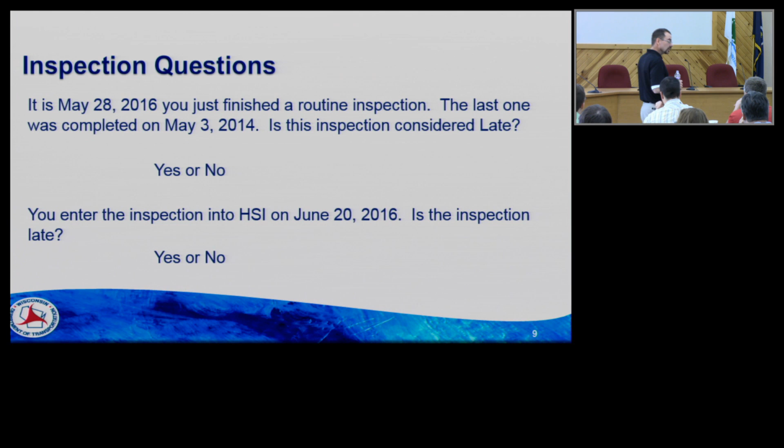All right? Now, you don't get around to entering that inspection until June 20th. Now is that inspection late? Yes or no? Anybody say yes? We got a yes. Anybody else want to agree with Mark? Okay. We got a couple. 3, 4. The rest of you say no? Okay, let's talk about this. The answer is no. It is not late.

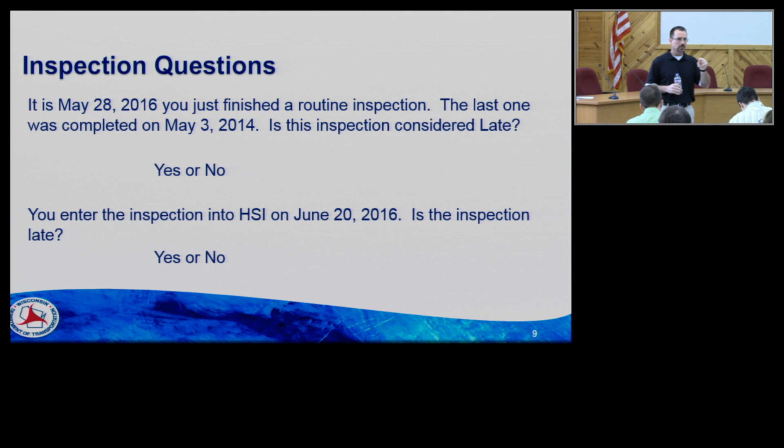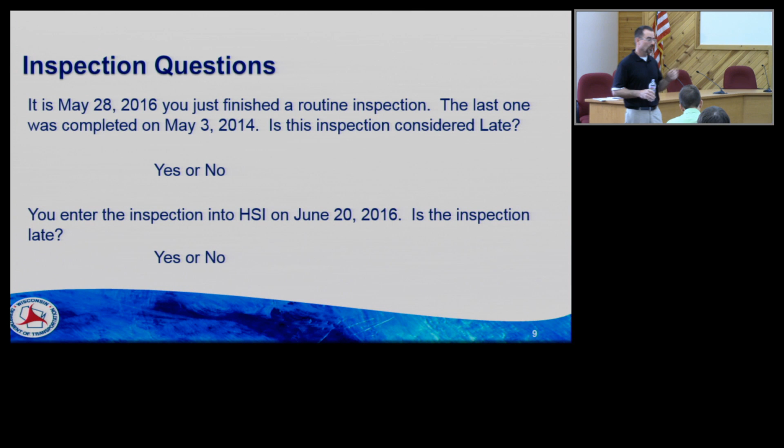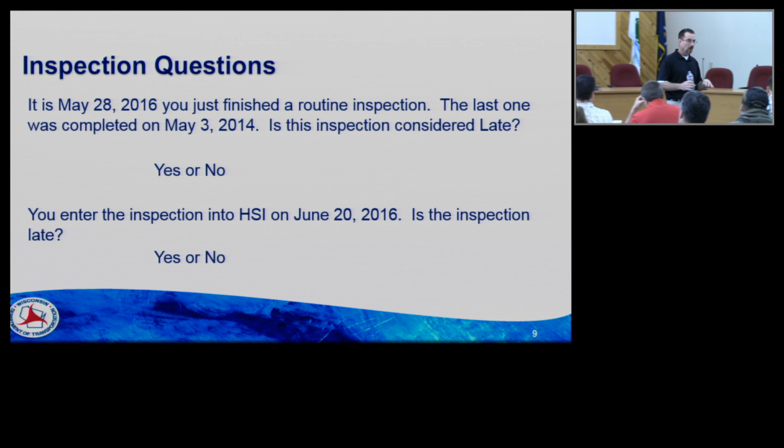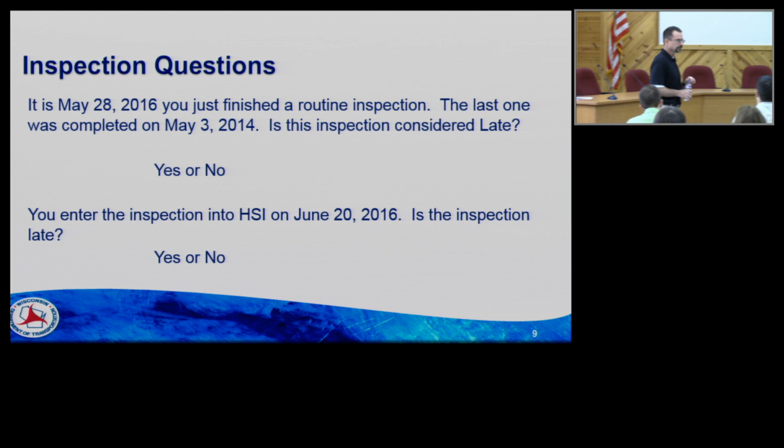All right? Because when you enter that inspection, and we're going to be talking a little bit about that during quality control, we are allowing you basically the next month to get it entered. Because we can track when it's entered. When you enter it, you're still going to put May 28th, right, as your inspection date. You should be, right? But HSI is smart enough to know you're entering it on June 20th. Okay? It is not late, even in June when you're entering it. Okay, did I just confuse everybody here? Okay.

And the reason I did that question is I want us to turn in our manuals to the last divider. Okay? So, we're going to talk a little bit about performance measures. I mentioned it in my introduction. We get measured on, because the federal highways, as they call them, metrics, everybody hear that term? They have 23 metrics just pertaining to bridge stuff that they measure each state. Okay? And one of the metrics is late inspection.

All right? And what we do as a state, because the state includes all the local bridges, remember the partnership I talked about in the beginning? You guys, doing your inspections, 2/3 of it go into the reporting of the performance measures because about 2/3 of the bridges in the state are local bridges. So what you guys do on the local side feeds into the performance measures for the entire state. Okay? And one of the things we do as a DOT is we monitor these metrics or performance measures, and then of course we report them out.

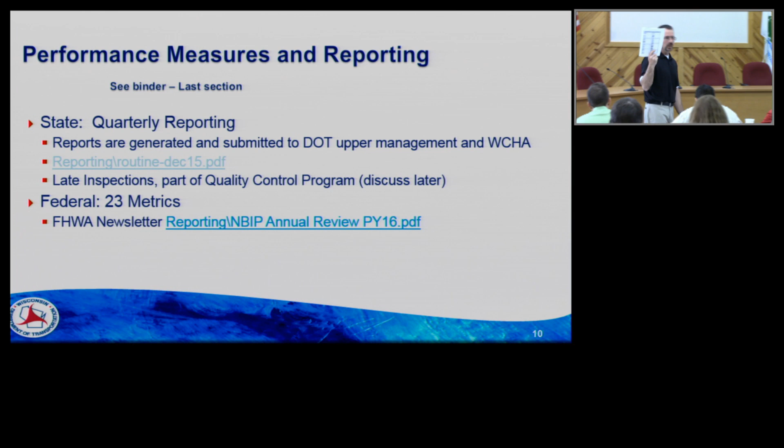And the quality control plan, which we're going to be talking about a little bit later this afternoon, a lot of it is geared, and that's only one of the 23 metrics in late inspections. So we're monitoring 22 other things. That's just the way it is. Willie? Most of these are probably load posted bridges. How many of these are attributed to HSI not knowing? Well, yeah, then you got to get into the details.

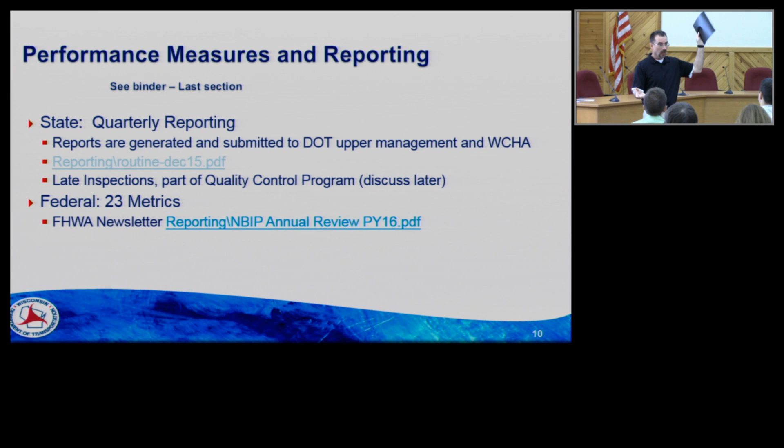Okay? I know for a fact what happened, especially out of the Wisconsin Rapids office, was we kind of got balled up switching from interim inspections on the 12 months to routine. Okay? We had interim inspections entered, but we were looking for the routine. It didn't see the routine, so it got flagged. That's our one on Chris's line that we missed. Yeah.

So we're constantly improving. That's one of the other reasons why I host this, to get this stuff so everybody understands. Last year, some stuff came out mid-year. We get emails, and if your emails are like mine, I fly through them because I get 40 a day, and it's like, okay, what's this, oh, here's another report, I'll look at it later. Well, pretty soon it's down below the screen, and I'm on to the next shiny object.

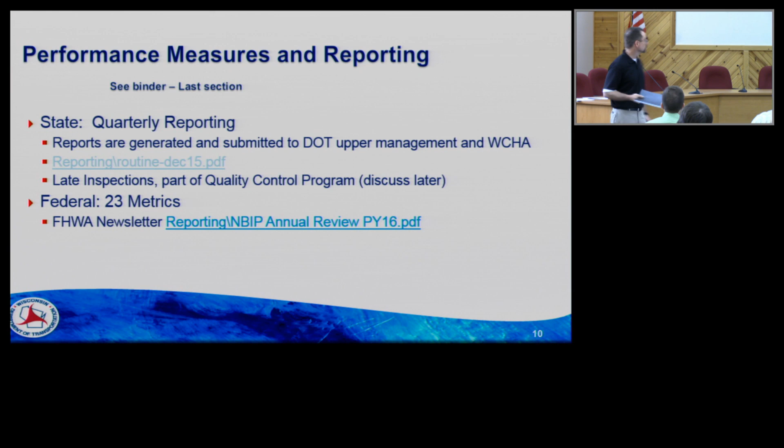Right. I think you just want to mention too that we don't allow interim inspections anymore, like for 12 months. In the past we have, but now they at least have to be a routine inspection, otherwise they get flagged. Yep, and we're going to be covering that real shortly with the load posted policies, but I'll just reinforce. In the past, we did a lot of interim inspections, load posted. Those are official routine inspections now, all right? All right. Tom, is it worth mentioning why we're doing that? Why they're now routines and not interims? A little history, a little background.

And I'm not going to steal the show, but we're not just doing these things because we decided that it was time for a change. FHWA pointed out that the National Bridge Inspection Standards for the different types of inspections, routine, fracture critical, and underwater dive, any of those special ones, gives us a maximum frequency. So for routines, it tells us that we have to inspect all bridges within 24 months.

It also requires that the state have a policy and procedure in place for a subset of bridges that will require an inspection frequency that is more frequent than the 24 months. We had that. They were the load posted bridges, the bridges that were in poor condition. We had called them interim or load posted inspections, which really don't fit what the NBIS is telling us. So the feds pointed out that we needed to change those and call those a full routine and treat them as a full routine in order to be in compliance with those National Bridge Inspection Standards.

So that is the big driving force of why you saw that change from the interims or the load posted inspections, whatever we want to call them, to a full routine inspection, because that is what we needed to do in order to meet the letter of the National Bridge Inspection Standards. That applies also to the underwater dive inspections. There, we have to do those within 60 months, but we also have to have a subset defined, which we have in the policy, of ones that need it more frequently.

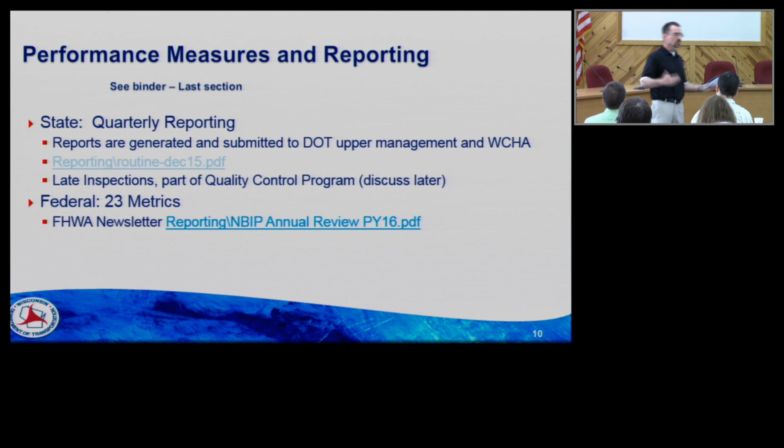So bottom line, we just don't do things to do things. We always have a reason. Generally speaking, 9 times out of 10, we're being told to do it from a federal standpoint for whatever reason, because they're looking at it from a national level. They're trying to improve stuff nationally. And it's like, you know, government, you got to fit everything into a box.

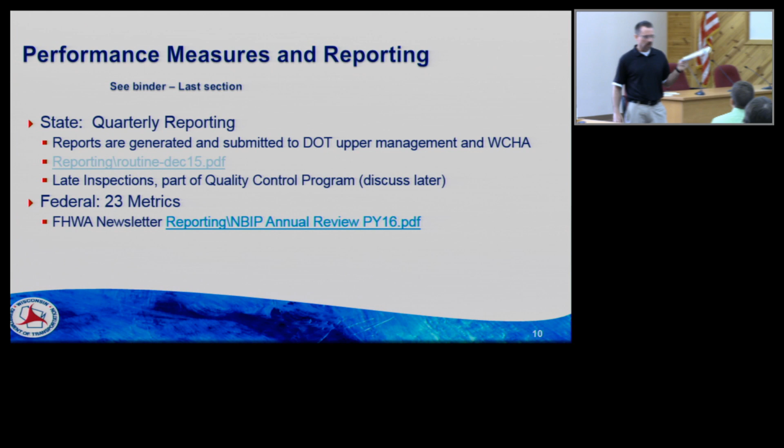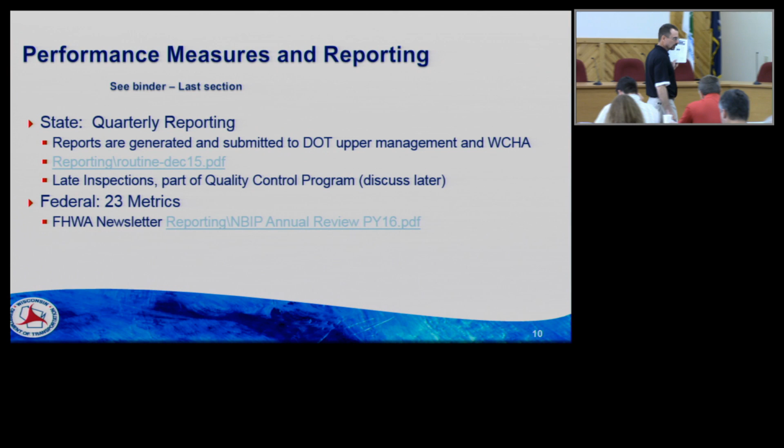Anyway, the other one, I'm not going to have you call it up. In that same section behind the pie chart performance measure, I provided, this is our federal bridge engineer for Wisconsin, Joe Bellucci. He put together this, you can't call it a newsletter for some reason, but it's kind of a summary of Wisconsin that he's issued, and he shares this with all his other bridge engineers across the country. You know, 23 metric performance. He tells us how we're doing. We're going to refer back to this a little bit later. Inspection frequencies, team leader qualifications.

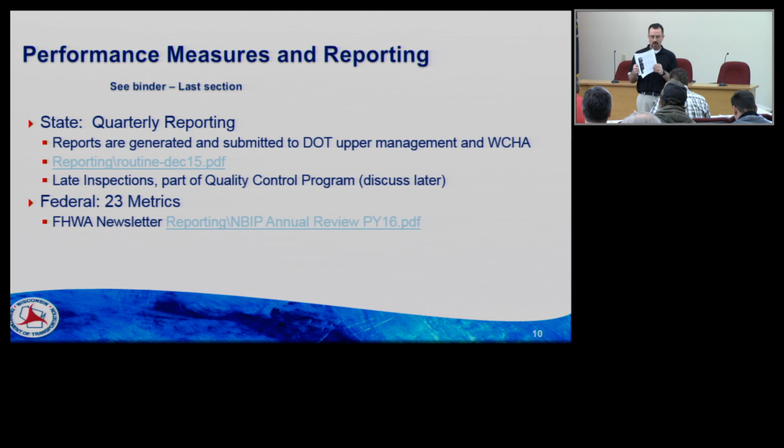If you get a chance, read through it. I didn't realize he even did this. I just got it about a month ago. I'm going to share it because we hear about these federal metrics a lot. And we do at the regional level, but we really don't see the outcome much. You'll see like this performance report, but like I said, there's 22 or 23 other ones. Maybe I'm missing it somewhere, but I don't see like a report card, unfortunately.

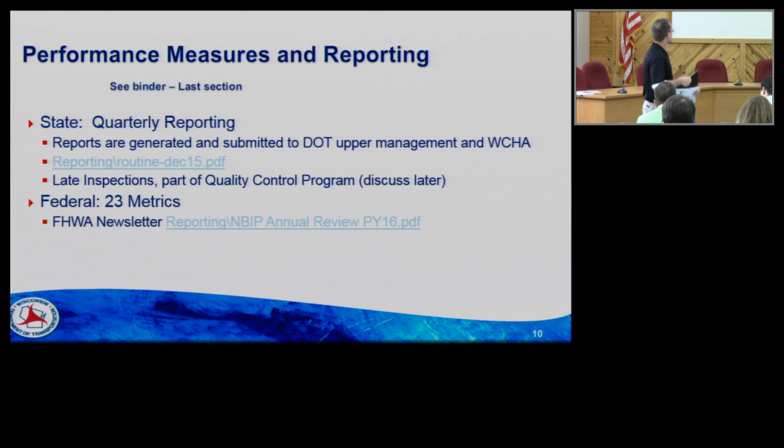Anyway. Next slide. And now what we're going to do, I got a series of about 3 more questions to get you guys going here this morning. That's going to lead us right into our current policies. So, all right, question number 2 for the morning. We're doing pretty good. I was gonna have a session called Stump the Instructor, but then I changed it, and I'm gonna try to stump the students.

You arrive at your bridge, you do just a normal routine inspection. The ADT listed on the form is dated in 1997 with a count of 150. Does that seem familiar? Local road, 150, 20, I don't know. What should you do? Nothing. You have no idea what the ADT is, right? Stay at the bridge for 8 hours, count the vehicles, and multiply by 3.

Order the municipality to perform a traffic count, or D, use engineering judgment and update the ADT year and the count. All right. Who says A? Nobody? Oh, we got one. This one? No one? Two. They're both commissioners. All right.

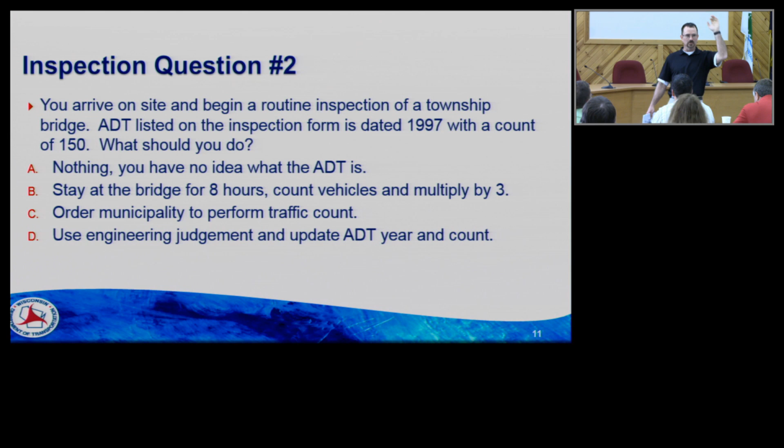Stay at the bridge for 8 hours, count the vehicles, multiply by 3. All the consultants are with this. Oh, no. Anybody say that one? Okay. C, tell the township to do a traffic count. Anybody say that? Or use some judgment, update the ADT and the count. Two people? What about the rest of you?

D? Okay. It's tough to do on the local system to get a traffic count. What's our requirement for ADT? Anybody? We want it current, within 5-7 years, preferably. Okay? You're on a town road, you're out there for an hour, 2 cars go by. Do you have 1,000 ADT on that road? No. Okay? If it's 150 or 200, the ADT really doesn't matter. ADT does go in the sufficiency number, but when you're on that low end, it doesn't count for nothing.

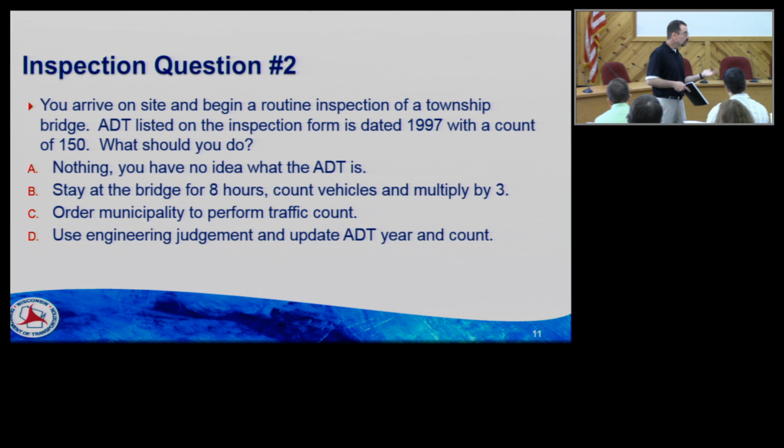So, my recommendation is get the year current, use some judgment. If you're out there and you're getting run over inspecting the bridge, you got a fairly high ADT. You might want to talk to the township. I know a few townships that have counters. Tell them to put the counter out. The counties, they do counting for their paving operations. See what you guys have, okay?

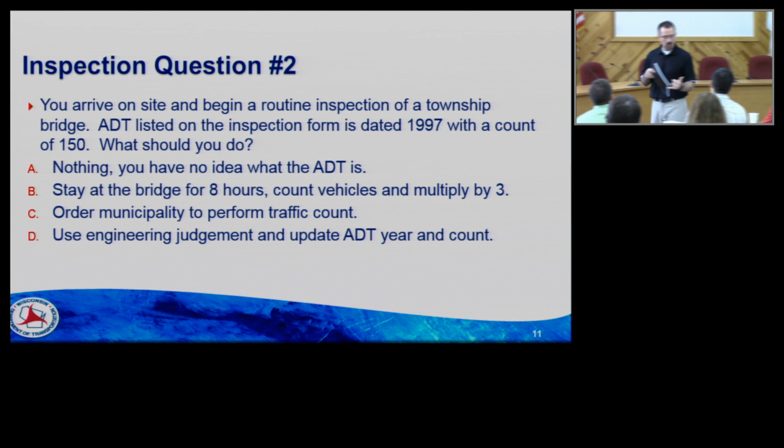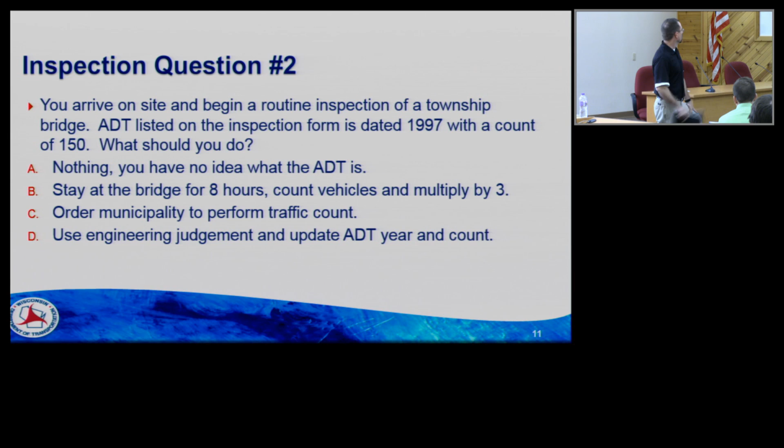All the townships and the counties have to run, what's the local, the PASER? Not PASER. Is that what it is? And part of PASER is ADT. I don't know where they get their numbers, but I know some townships, they do some hose counts to update their roads. So, D is the final answer. You can always call a friend here if you want to use that option. All right?

Next question is, all right, we just got 3 inches of rain, and most creeks and streams are overflowing their banks. Another inch of rain is forecasted overnight tonight. You got 2 scour critical bridges in your county. You're the bridge inspector. What are you going to be doing? This is fairly similar to what happened about a month ago around here. As bridge inspectors, what did you do? Did you find the POAs for the scour critical bridges and begin flood monitoring, as outlined in the POA, plan of action?

You start monitoring all the bridge crossings in the county. You notify your program manager, PM, of the conditions and order new profiles for all the bridges because of the significant flood event, or D, all of the above. All right? Anybody for A? Couple? B? C? E, phone a friend? Okay, you should be doing all of it. You gotta recognize you have a flood event.

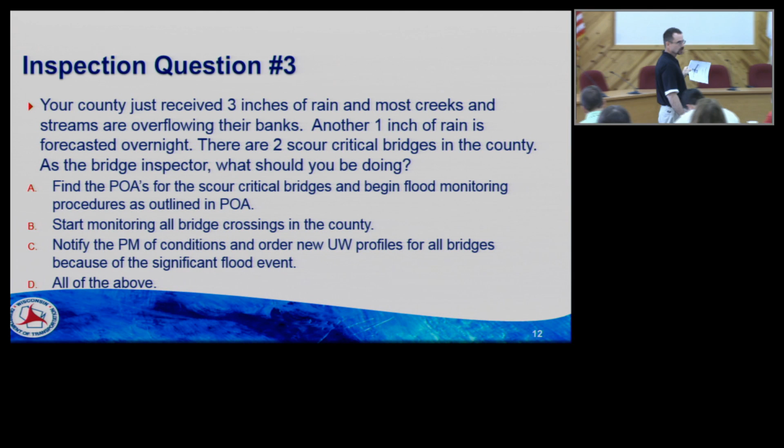And what's the controlling limit to order a new profile? A significant flood event, which is defined by a creek or stream overflowing their bank. So in this case, countywide, you should be doing all brand new profiles with this round of inspections. Okay?

Questions? Chuck? As far as monitoring the stream with the plan of action, that responsibility comes to the owner of the bridge, correct? That comes to the responsibility outlined in the POA. Okay. And however the POAs are written, a lot of it falls back to the county highway department, or possibly the town or the town person.

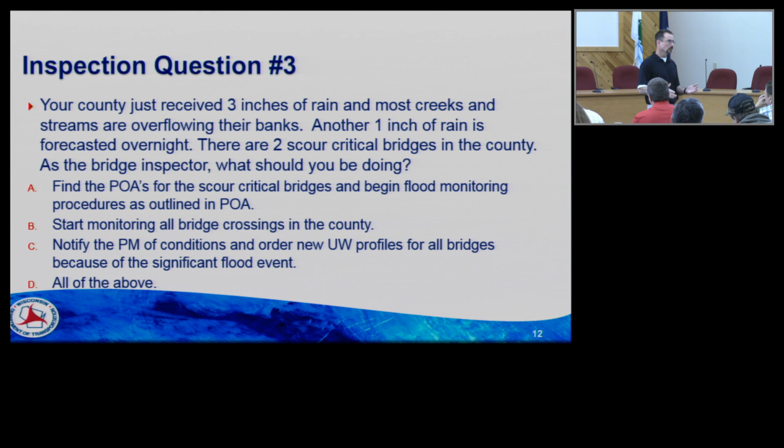But some of these POAs, and that's why the POAs all have to be updated, were drafted in 2010. People are gone that are listed. All right? So that's one of the reasons why we're updating the POAs. All right, any other questions with this one?

All right, next question. You just finished a 24-month routine inspection of a bridge with a 30-ton load posting. Okay? I know, don't say anything. You downgraded the NBI super from a 5 to a 4 based on conditions. What's going to happen?

A, a new load rating is required. B, you need to perform an interim inspection every 12 months. C, the bridge will automatically be placed on a 12-month inspection frequency. D, you should fill out a new load posting verification form, DT 2122, or nothing. Just enter the inspection and be done.

All right? A, B, no B, C, a few, D, is there a couple, or E? Where's the most of you? Yeah, I saw about 15 hands go up. Okay. Answer is C.

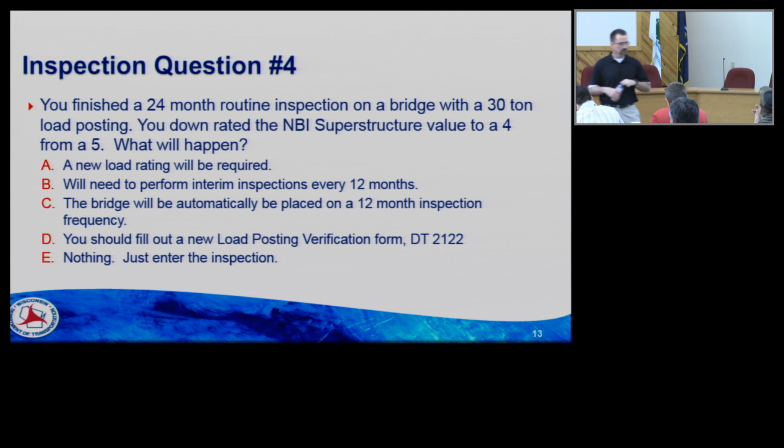Now, I did see a couple in HSI, like on our bridges, I got 2 of them that were load posted and the NBI form, it's still listed as a 24 month. Load posted. One is 35 ton and one is 40 ton. Okay, well, it should be 12 months. Right now, the only thing we kind of figured out is that it was done in 2014. And next time you enter an inspection, just change the 24 to 12. That's what will happen. Don't worry about the 24 months.

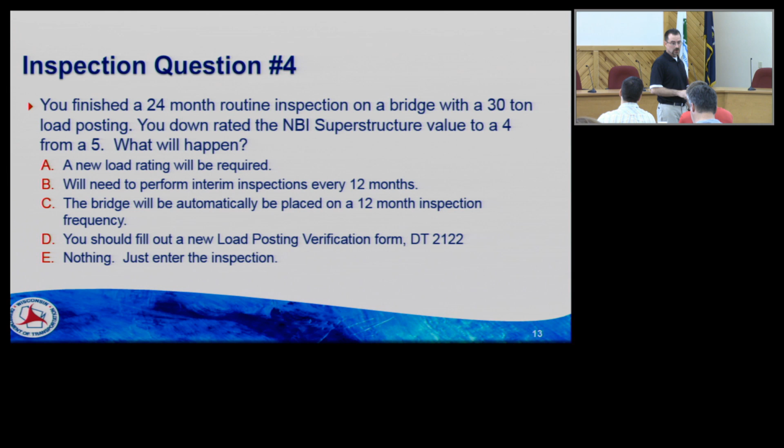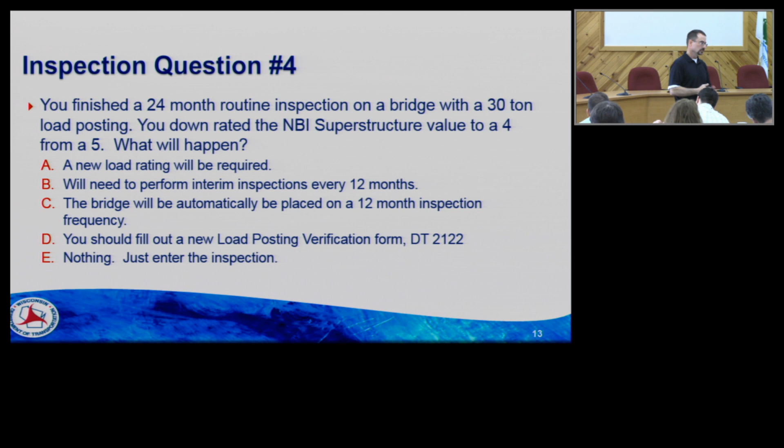What will happen in a case like this is HSI, you enter that inspection, you drop from a 5 to a 4, HSI will automatically put it on a 12-month frequency. Okay? It's programmed to do that. And you'll see this little thing, if you enter the inspections, right under the main edit page, it'll say changing frequency to 12 months, okay? It will do it automatically. What happened last year, mid-year, we changed it. We'll be getting to that. It's in the policy, okay?

Now I got one more question. Any other questions with that one? Okay, now we're on to the underwater probe question. You're performing a probe activity on a 3-span bridge where the entire channel is in span 2. And all the substructure units, all your piers, are dry. What do you document for the probe activity? A, document the channel condition and water depth for the channel in span 2. That's where the channel's at. B, you document conditions at each substructure unit. Or C, no documentation is necessary because all your substructure units are dry.

Now you only have 3 choices. Unless you want to phone a friend. A, who says A? We got 1. Anybody else? B, document condition. Okay, good. And C, we got a couple. All right, answer is, I should add a program where it sorts. I'm talking about an IT person. It's B. You still have to document on the probe each of your substructure units.

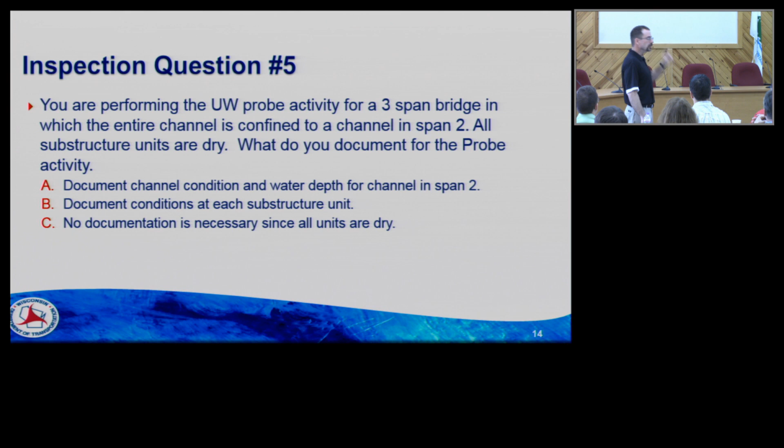Okay? And we'll be getting to that because this is one of the things I saw last year, pretty much uniform. These probes were not getting done with the routine inspection. They were blank. The form printed out, they were there, and the thought was you did a profile, you don't have to do a probe. No. You have to do your probe, you document it with the routine inspection. So, we'll be getting to show some examples of that.

Any questions with that? Can that follow the inspection, a future inspection later? Is it a matter of scheduling somebody? Yeah, say for whatever reason you couldn't do the probe that day, you can enter it later, and say it's 3 months later, your inspection is closed, completed. You'd have to enter it as an interim. Okay? The intent is you do it, it's like the old visual probe on the previous forms. 9.9 times out of 10, you're doing that while you're doing the bridge inspection. There's cases it's flooding or high water or whatnot, you have to come back.